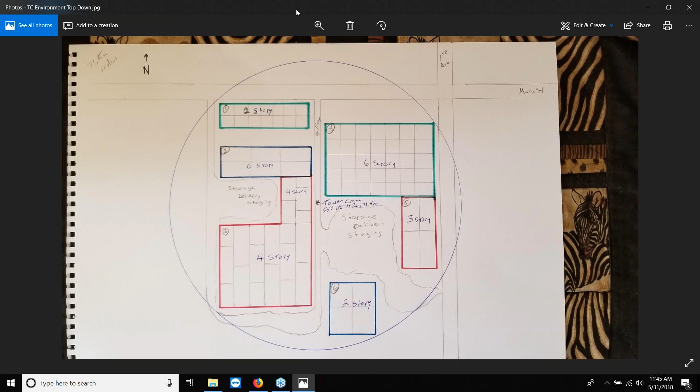We talked about this and decided we'd make a construction environment with buildings still under construction, skeleton structures. We have Mike's existing sketch right here, and this was the very first sketch for a tower crane environment. We talked about making buildings with different stories, having staging areas around here and over here, and roads running along, possibly with power lines on the side, First Avenue and Main Street, just simple names, but it gives you an idea of what the environment was supposed to look like.

We got a perspective sketch here, and you can see there are side alleys and staging areas and trucks that you can lift onto and off of. From that we went to a more detailed sketch, with trucks labeled T1 through T5 that loads can be lifted onto and off of, piles of materials, steel beams and cribbing, lumber stacks and cribbings, staging areas, covers, ground vaults that we can play around with. These buildings are labeled B1 through B6, and they all have hatches H11, H12, H21, and so on and so forth.

If I can jump in, Ken and Chris, it might be helpful to the audience that our methodology for training and assessing crane operators in simulation is really to make a sport out of it, for lack of a better term. So we build an environment, and it's like a game where the operator will take on upwards of 40 to 60 tasks, which we call scenarios, but might be levels for the Halo players out there. I don't know what the kids play anymore, but growing up we played some Halo. Chris, what was your game of choice? Were you a gamer?

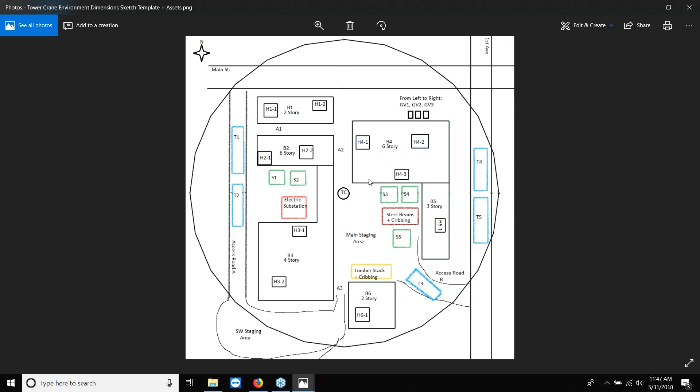I saw the initial drawings, the hand sketch drawings, quite a while back. We talked about that. Yep, and this was our more detailed sketch, and this is actually what we map out our scenarios on. You'll see that a little bit later in the scenario templates that we designed and wrote out. So you go from that 2D sketch to a 3D environment here that I just quickly mocked up, and you can see the scale and scope of what we're trying to do here.

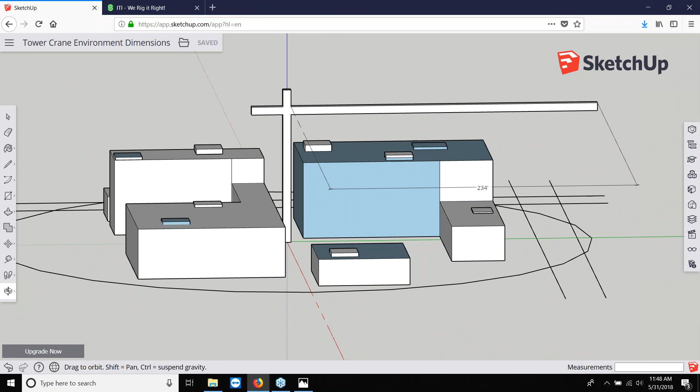You can see that jib is dimensioned out 234, 235 feet, somewhere in there. You can see the overall radius of the crane, and it contains all these buildings, a little bit of these roads. So if we wanted to lift off of a truck that was staged on the road there, we could.

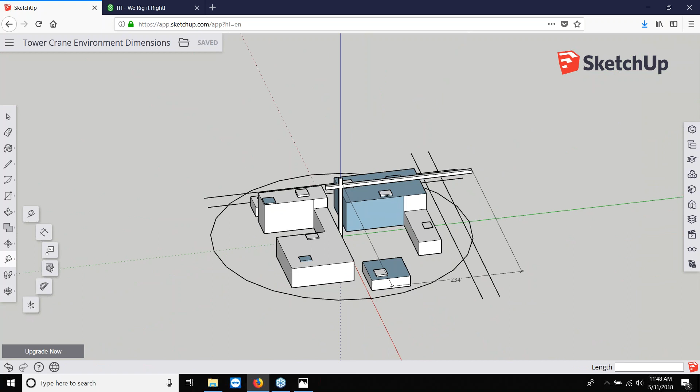Not a lot of detail here, but you can see, and if you needed to, you could go back and dimension out this building, it's 112 feet wide. This thing here is 93 plus 114, so you can see that's about 200 feet across there. So it gives you a good idea of the scope.

And so that's more or less our environment. We're working on that as we speak. They're building that out, and I think tomorrow we've decided on a deadline for the scenarios in the environment, and they're going to get started working on that after this week. So any thoughts, comments, concerns, anything look wildly out of place here, or something you think maybe we should have?

Well, you've compiled a lot of different buildings into a singular site, which I don't think is a bad thing here, because you covered as many potential scenarios as you can. A little bit more realistic a lot of times is just the fact that you've got a crane working on a singular structure that's eventually going to top climb, and it's on the outer edge of the building and maybe reaching across the building. But I think with the use of the multiple buildings here, you can achieve testing skill sets just as easily as if you were to make it a singular building.

Yeah, and the idea behind this environment was to create something where we could have 20 or 30 scenarios that were all new, while reducing the amount of effort and impact on the developer side of having to create too many different locations, but we still have a good variety, and we can initiate things like blind picks and a lot of those different types of scenarios that we wouldn't otherwise be able to do.

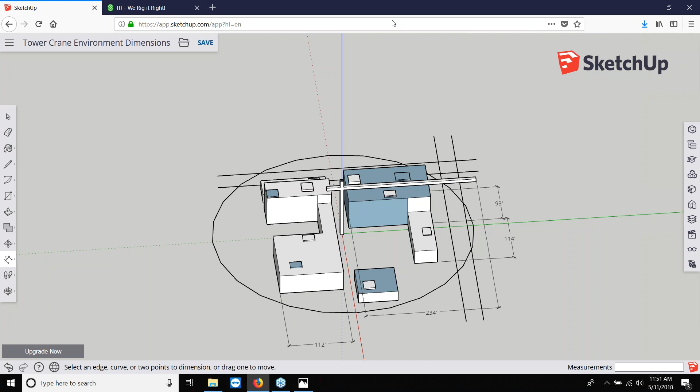So great overview, Ken. This is looking really good. And speaking of scenario design, I think that's a great place to jump off and take a look at some of what we've got planned here. Specifically, the one we want to show off is the Christmas tree load.

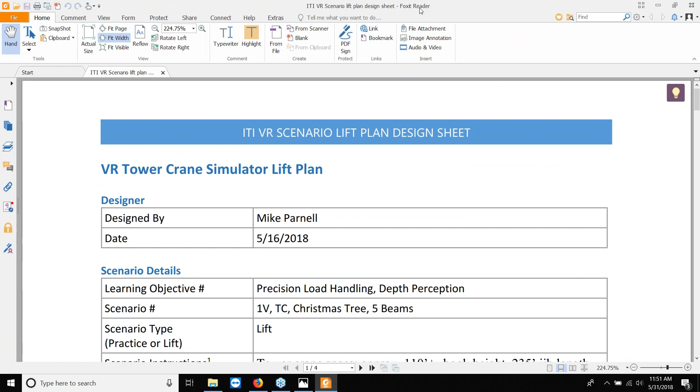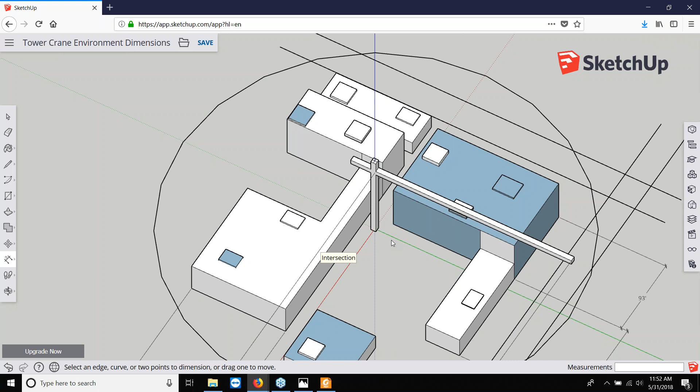It's something that I've been told is very common in construction, to rig up 4 or 5 steel beams and lay them across one at a time, girders that already exist, and just kind of bolt those in there. So what we've planned to do here is, let's get that popped out. The plan is to take one of these existing hatchways, about 20 feet wide, and lay those beams one at a time in there, and cover it up, acting as though that would be a common task in steel structure erection.

So the exact plan here is that the beams are lifted off of this pile, and they're rigged up and ready to go as is, and they're more or less ported over here to panel H, or to hatch H3-2, and laid across one at a time, as we have 2 signal persons or 2 construction workers essentially moving with the load and snapping those beams in place. Some of it's abstracted a little bit, but that's the general idea, is to try and emulate that Christmas tree load laydown as accurately as possible.

So what you would do is take those beams and use them basically to complete the H3-2 opening and place them exactly. Okay. Yep.

That makes sense. I thought you were going down inside the opening. That would be not realistic. That's not the plan. We do have loads that we're planning on dropping into these hatchways, and we'll go down.

And we have a couple questions about that regarding like what kind of signal person layout we'd need inside the buildings to get that done. But we did have a couple questions about... well, we can wait on those.

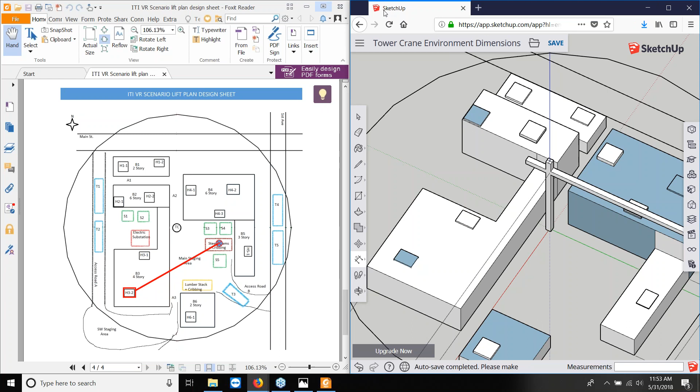We did also have a pancake flip scenario, and that's something that... it's right here. And this is sort of a holdover from our overhead crane environment. We're trying to reuse these loads as much as possible, and it presents an interesting challenge to the operator, especially up at 200 feet, to get this thing flipped over.

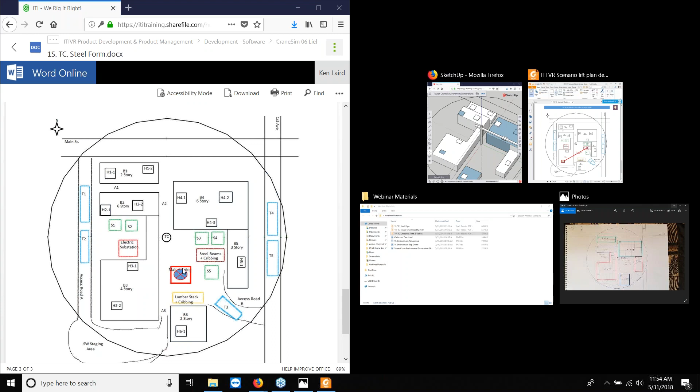But the idea is that it's more or less staged already in the area, and you lift very gradually. You trolley out and you hoist up gradually to get it up to the top point, to lift it vertically, and then to lay it down again horizontally.

And the plan is that... I don't know if you've seen that much in tower crane or otherwise? They do it a lot with precast. What they'll do is there's a lot of precast tripping where they'll have to take the precast, trip it to a vertical position. Usually they don't have to lay it back down again.

It's a cladding that they're going to apply to the outside of the structure, or something like that, is usually where you're going to see that happen. So you wouldn't have to necessarily trip it up, stand it, and then lay it back down again. It would be much more common to hang it off the side of the building in a vertical position.

Good to know. That's something that we'll take into consideration when we're talking about this scenario, is if maybe we just stand it up and then get it directed over to the side of a building where we've got a hole or something. All right, excellent.

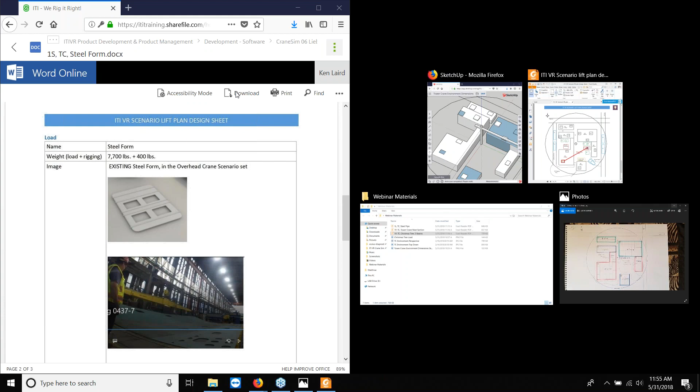And then I think we talked a little bit, part of the agenda was that one of the new elements we're introducing here is our control evaluation. So the idea is that before we do a scenario, or before we do a certain set of scenarios, the operator gets into the crane and they evaluate their controls.

They hoist up, they hoist down, they trolley in and out. They swing left and right, and they throttle up and down, and they just evaluate and make sure that all these controls are working correctly. And so we're gonna make that a pre-scenario, like checklist sort of thing, like we do with some of our other training events and pre-operation inspections and all that.

Do you have that process? So is it all there in that paragraph? Yeah, so the operator is presented with a checklist of functions and limits on a jumbotron or a holographic panel, not unlike what we use for the load chart checklist. Chris, I'm not sure if you can read that, buddy, but yeah, I can.

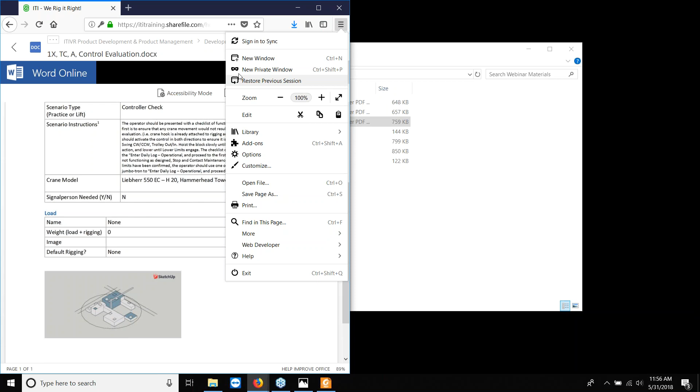So a little bit. Do you guys incorporate... I don't know, maybe this is difficult to do, but what about other visual inspection checks on the crane, like bolted connections, gearbox, wire rope spooling on the drum? Is there capability of that or not really functionality?

Yeah, as of right now, we don't do that. We don't go up to the crane and inspect it, but we have that pre-operation checklist where we say, okay, name the 5 things that you'll want to look out for when you're inspecting wire rope reeving, and you don't want rats nests, or you don't want corrosion on the cables, you don't want splitting.

If you can pull that up, you might... I don't know if you can pull up the simulator now and show them. If it's not fast enough, that's fine. But Chris, we have handled, it's certainly easy to do in VR.

We haven't proved out that it's required yet for most of our subscribers, because the knowledge is very much like knowledge training that can be taught with visuals, a lot of pictures often, which is what we do in a classroom. So we haven't really... the utility of the VR headset is what we're trying to maximize, because that's the expensive part, right?

Oh, no worries. Yep, so it's a good... we're doing a study with a certification body, and we're going to rope in the pre-op inspection task. We are going to do that in the same methodology that they assess people in the actual exam, with a multiple choice type checklist as opposed to in-person. But I think we'll get there eventually.

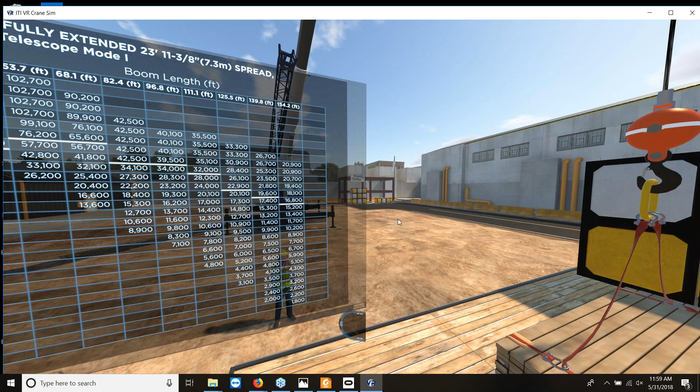Yep, dumb question, I know. We want to verify several nuanced things. One thing we definitely lack as a company, and that's why we partner with Morrow, is on tower cranes. We don't have a ton of tower crane experience, we've got 15 trainers, mostly related to mobile.

So to give you an idea of how we handle that in the sim, we have a load chart here, and you can quickly select some of the components, the rigging, the headache ball, and all that. And so what we do is we basically just have users fill out this checklist. There you go, you just freeze frame it. So we have users fill out this checklist and select their capacities from this chart here.

And you can see, because it's working at load radius of 60 feet, 82-foot boom length, you can select that from here. 60, 82, it would be 15,300. We've done this a couple times. And I'll show you more specifically the pre-op inspection.

Yeah, great, the quizzes that we do. So Chris, that's just called a pre-lift checklist. And it was hard to see because in VR, obviously the user is just looking peacefully to the left and to the right. It's not very fun to see on a laptop.

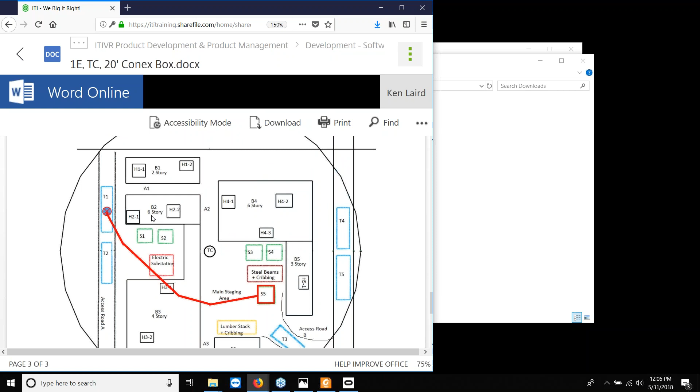All right, excellent. So we had another one, a couple more actually, specifically with a tower crane mast section load that we'd said we couldn't really fly over buildings because there were people moving around on buildings. It was deemed too hazardous, so we should have pictures there. Here we go.

So this is the load path we chose here specifically because we'd say building B3 has too many construction workers moving around on it. It's too big of a hazard to move it over them while they're under construction. So we'd have another signal person move the load around B3, kind of in a blind pick position from T1 or T2, and then move it to staging area 3.

Does this seem like it would be okay to fly a load around a series of buildings in order to avoid carrying that load over people, or would it be more standard to carry the load over the building in that case? You know, both scenarios work.

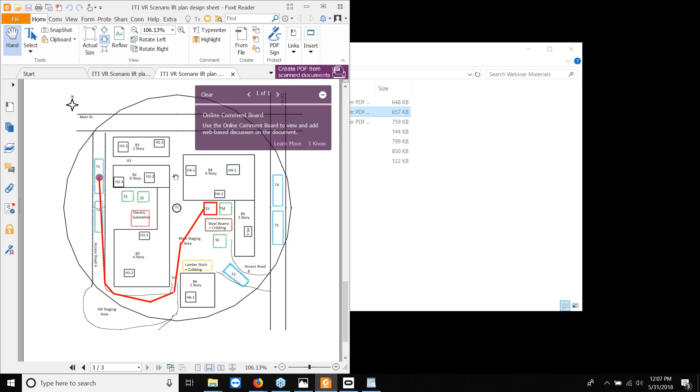For an example, just to give you an idea, see where your A2 is north of the tower crane there, and we've had this scenario come up before where, let's say the truck were out on Main Street, and the guy wanted to pick up the load, but you didn't want it to fly over B4, B1, or B2. Well, he'd have to trolley in all the way to where he was inside the B4 building before he could make that swing to the right to trolley back out and set it at your S3 pad there. Right, so we actually have scenarios where, because of prohibitions like that, hospitals will do this to us sometimes.

The crane, like the 550 you're talking about, has one of the capabilities it has is a work zone restriction system in it. It would actually create a blocked out area over that B4 where it wouldn't even let the crane swing over top of it. So you either have to come inside of it or go outside around that building.

So that definitely happens. And you can program that in the LMI, not in the sim, but in real life, you can program that into the LMI where as you approach this blocked out area, you actually slow down and you're not allowed to swing left or right, or trolley in or out to get the crane hook over that area. That's correct, yes. All right, good to know.

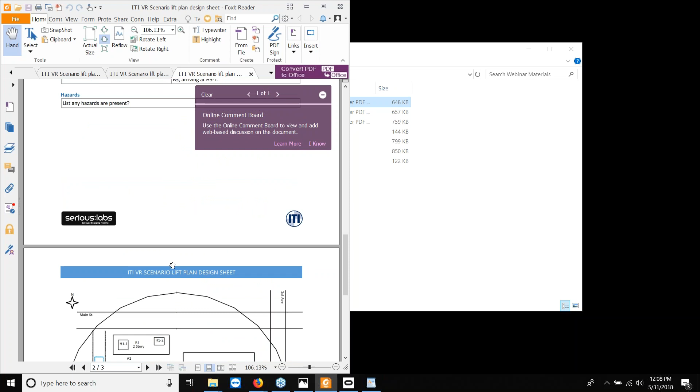Thank you, and then our last major question here was this steel pipe. Nothing particularly about the load path itself, we're swinging over these buildings, but when it's lowered into this hatch here, this is a 3-story building. The idea is that the signal person on top, if it's lowered all the way to the ground, won't be able to judge the depth all the way down.

So if there is one on the roof of building 5 here, is it necessary to have another signal person inside at the first floor, the ground floor, or a basement level to radio it into the final landing phase, or is the signal person on the roof good enough? Can he say, okay, lower it to the ground, I can see you're about 5 feet out?

Well, most of the time with tower crane operations, it's almost always verbal communication. You talk to any guys preparing for operator certification or any guys with experience with tower cranes, hand signals are very infrequently used.

Especially when you're looking at that distance, that's a pretty good distance - probably close to a couple hundred feet. I assume the blue on the left side is the starting area and where your mouse cursor's at is the finishing area. Is that correct? Yep. It goes from staging area 2 over building B2, hoisted up about 70 or 80 feet in the air to clear that building, then fly over building B4, and finally arrive at hatch H5-1.

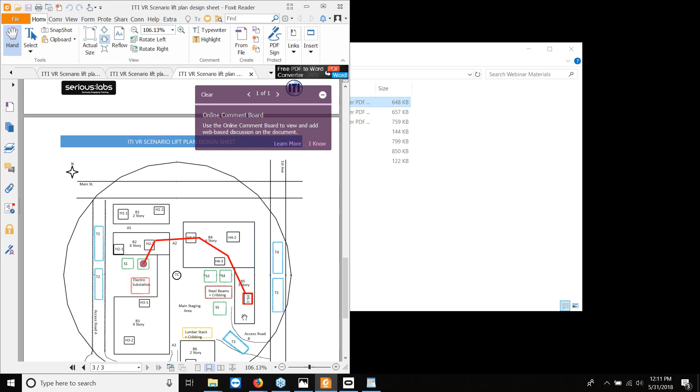I think there'd be a definite pass off here. You might have one guy, because if you had the guy down inside H5-1, he'd have a problem getting the tower crane lined up in the first place. And the other thing is always going to be that perspective as to landing the load. You're talking 3-story buildings, so 20 feet down inside that hole. You're definitely going to need somebody there to land it, so you don't just slam the thing into the ground.

All right, good to know. And I think the idea was in the scenario that we have a third person in there. Yeah, and it's not uncommon on a tower crane job site to have multiple signal people.

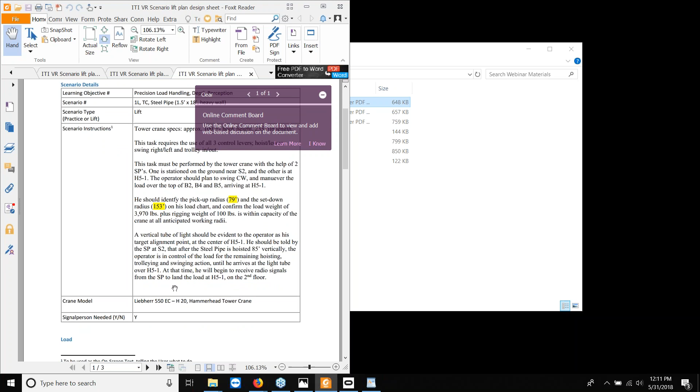So let's say you're working a really high structure, 20 stories high, they're rigging loads down on the ground where your trucks are at, out on the access road. Is the expectation that the signalman starts off there at the truck and then runs over to that building, gets up 20 stories, and then signals that guy in to land the load on the roof of the building?

Probably not. So you're going to have one guy starting over at the trucks. You're going to have another guy finishing over at the landing zone. Okay, all right, good to know.

All right, well, that's all I have as far as scenario questions goes and showing that off a little bit. At this time, I think we'd like to start taking questions from any members in the audience. Were there any other questions? No. Did you have any other questions? Anything you think might make a good list? Any comments, Chris? Not right now. I mean, I think you guys have a really good start there and stuff. You've got a lot of challenges presented in the one setup with all that.

Were you guys going to look at remote control operation at all, or just strictly cab operation? We did have a person ask about that, because we've got a belly box in development, and a guy asked about incorporating that into some of our existing setups over in Europe - 95% of crane operation is done remotely there, at least that's what he told me. So we talked a little bit about that.

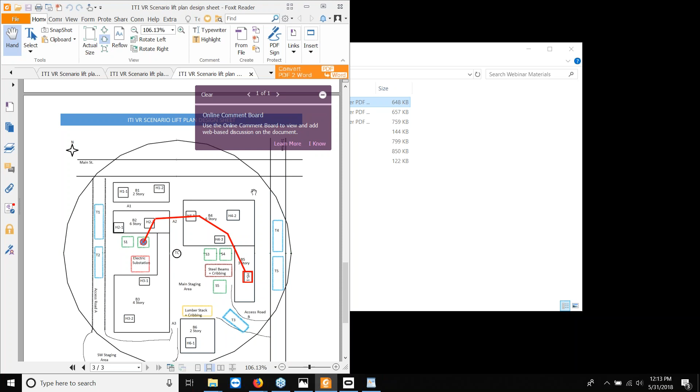Zack, what are your thoughts, Chris? Well, on the hammerhead cranes, we do it infrequently, but it is a possibility. I guess what it would really come down to is developmentally, what do you guys want to look at in the future? Do you want to look at potentially a self-erect tower crane alongside a hammerhead tower crane? Obviously, with the self-erect tower crane, you're primarily going to be running that off a remote control box. That being said, you can achieve a similar feel between the two cranes, regardless of whether it's a self-erect or a hammerhead crane running off a wireless remote control. It's going to be much the same experience. Yeah, it's interesting.

So for our overhead crane simulation, every scenario can be run from a cab operated perspective as well as on the ground through a belly box control. I'm sure we could do the same thing for hammerhead. We'll definitely take that into consideration for development. One thing to point out is we need to understand the hardware requirements for that.

The other thing to understand, going back to scenarios, is that the environment we're showing is mainly for lift scenarios, which typically entail a signalman or bellman and loads flying. We do have about 40 to 70 practice scenarios as well that are basically self-study and don't entail a lift and a bellman. It's a lot of practice time.